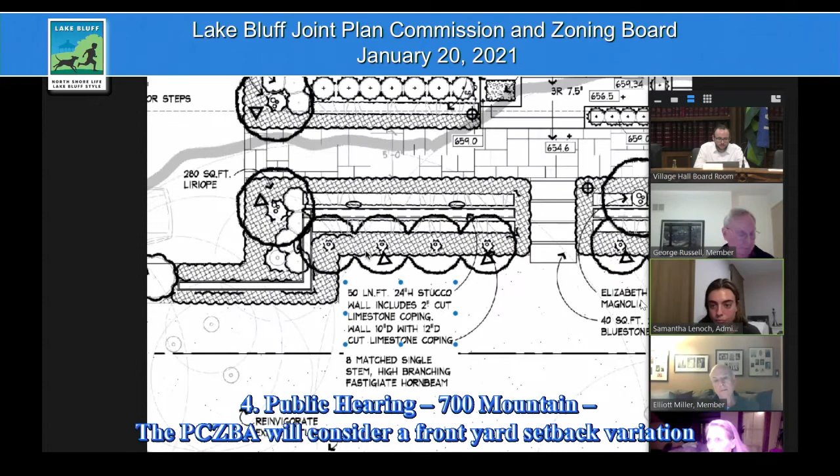Thanks. Okay. Are you seeing my screen? Yeah, yes, yes, okay, great.

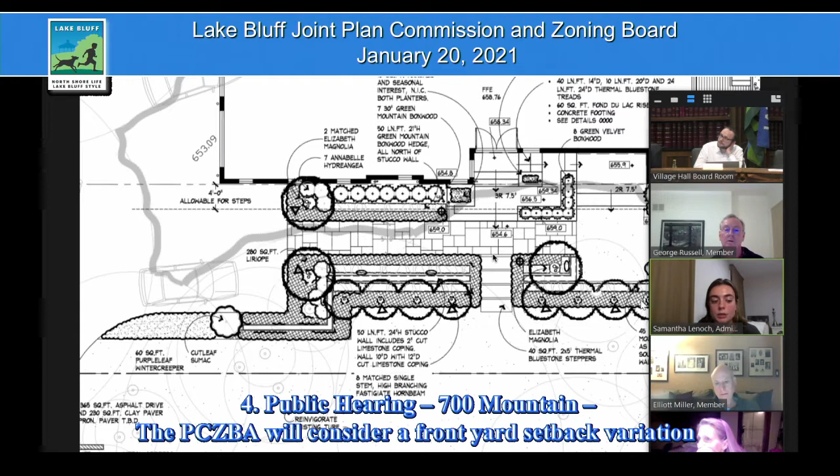So the village had received an application from the homeowners at 700 Mountain Road for a front yard setback variation to build a new front stoop and steps. The front porch and steps would encroach a total of 6 feet 1 inch into the 30 foot front yard setback. Front steps are able to encroach a maximum of 4 feet into the front yard setback, so the new stoop and steps together would need to surpass this by 2 feet 1 inch. Here's an overview - I don't believe this one is in the packet - but it shows the 4 feet allowable for steps plus the 2 feet 1 inch increase for the stoop and steps.

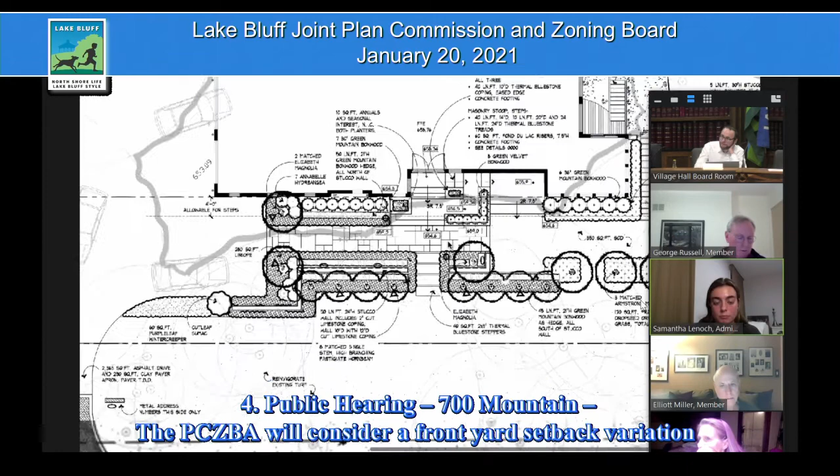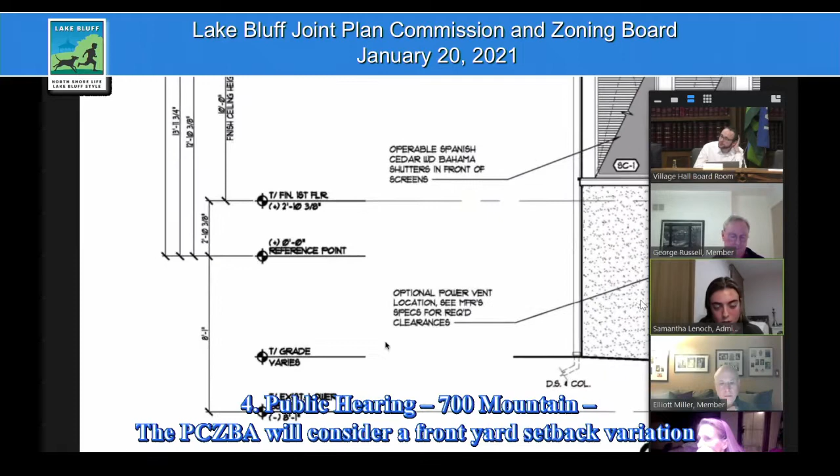And I also have the plan for the elevation as well, Glenn, if you'd want me to share that. Yes, if you would. Sure. Okay. So the south elevation here - for the commission's reference, the south elevation is the front of the building. Yeah, so this is the south elevation, that's the front of the building.

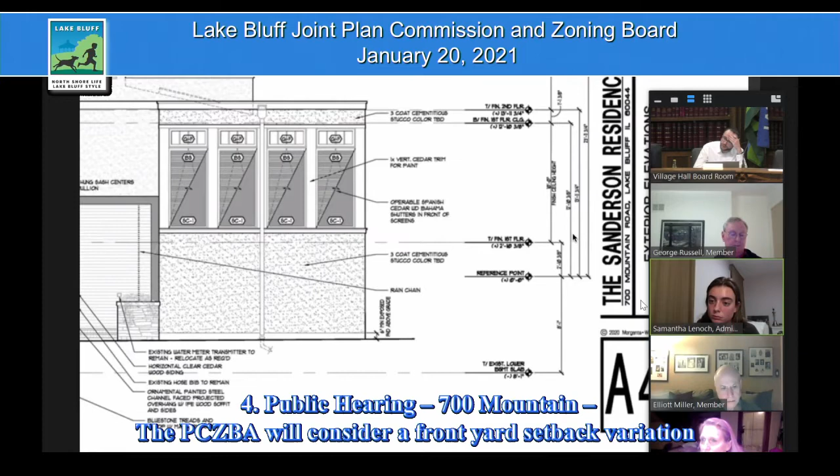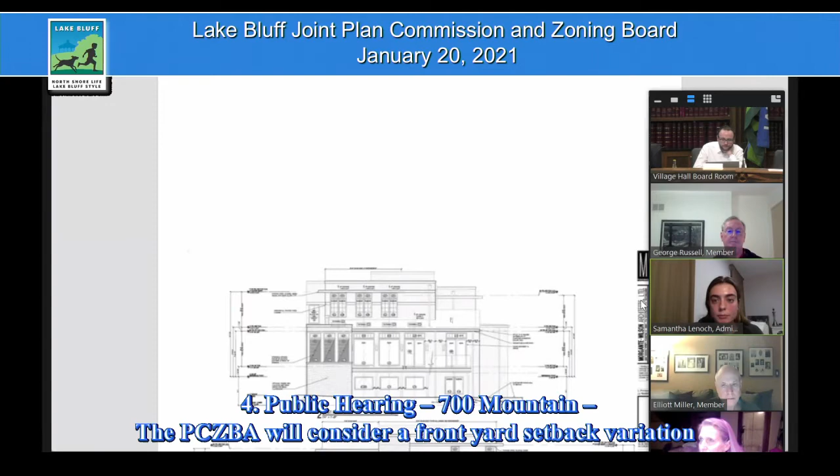And then Ms. Lenoch, if you would - I think there are a few renderings the applicant's architect shared with us as well, if we could go through those. I know those were only circulated earlier today, and we should make sure everyone has a chance to see those. Yes, I'm going to stop sharing this and switch over. Okay, so here are the pictures that were sent to us as well.

Maybe. Yeah, I also agree. I'm a little bit confused, I guess not confused, but it's not clear to me exactly where the variation starts and where it ends, from a top view perspective.

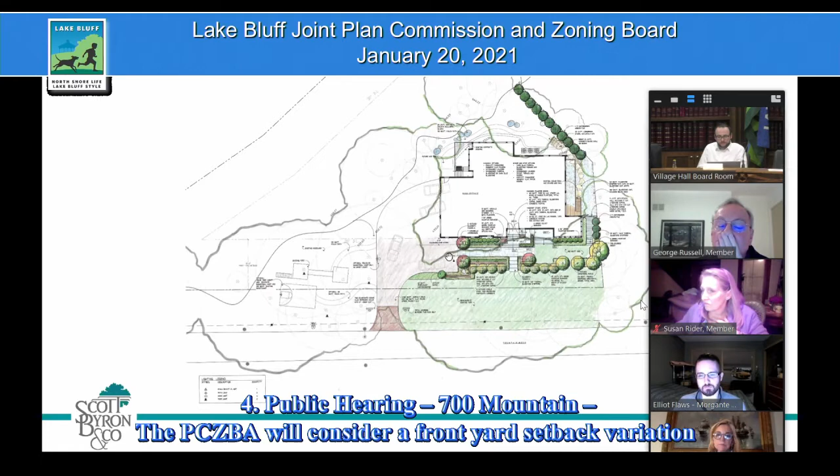So the variance package on behalf of 700 Mountain was intentionally and strategically outlined a certain way. The challenge quickly became for us, as we entered the landscape architectural arena, of how we get the client today from the elevation of those front doors down to ground level. So the client's ask of us was to make this aesthetically pleasing and also coincide with Morgante Wilson's effort. So what we'd like to present to you is this PowerPoint slideshow, and I can just quickly give you a run through. It'll create a backstory, a narrative, and an overall synopsis for everyone, and then I'd like to open the forum up to Q&A, if that's okay.

So, what we are looking at right now is a complete rendered plan, which highlights the aesthetic and how the overall landscape will coincide with the pursuit for this variance and how it relates to the front door and getting the client down to ground level. This is a final product. We feel that the aesthetic honors the Lake Bluff overall look and tradition. We can review this further, and you guys will have this accessible anytime.

The next slide will show us, once Ashley moves that, a direct effort in our pursuit. This outlines steps and the elevated planter walls, everything in red here. This is specific to the construction of the architectural component and also for Morgante Wilson.

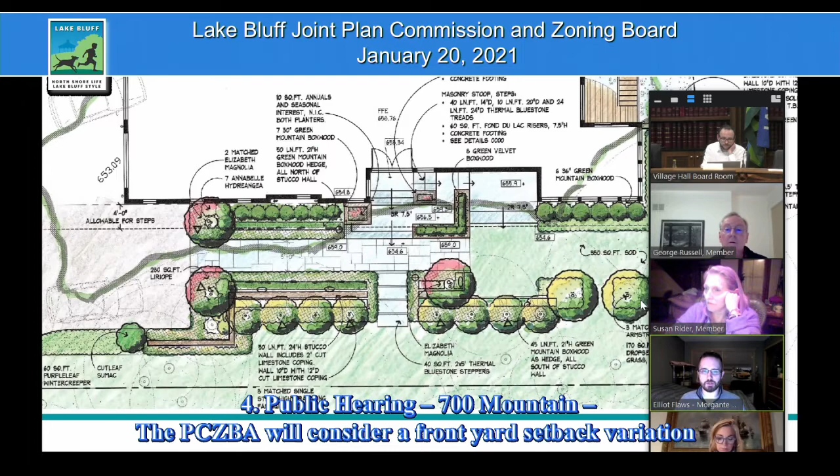So you can kind of see an overall picture, but what we're trying to get for a variance is what's extended into the front yard setback, just the leading edge of this stoop and stairs.

The difference between the front door elevation between the original existing home and where it's at now: the existing home had a 6'8" basement ceiling height, and it was the owner's desire to get a taller ceiling in the basement, make it more usable and more comfortable to be in that space. So in doing so, we raised the first floor up, and the front door had to go with that.

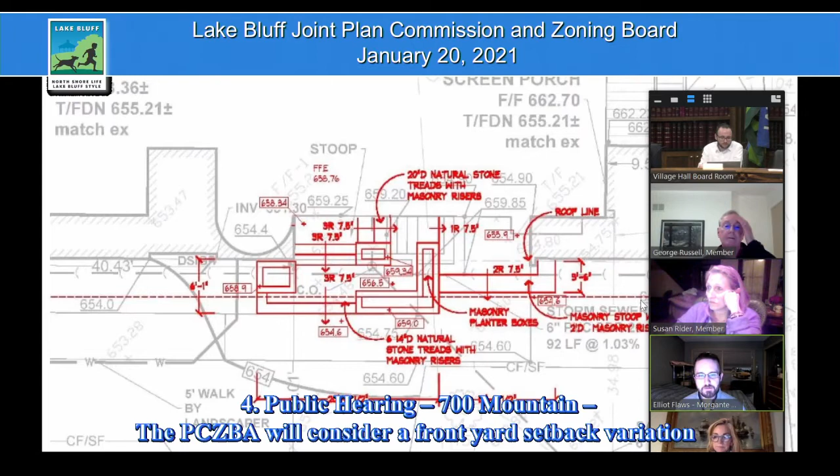Ashley, if you don't mind showing the first floor plan that I had sent you this afternoon for some reference.

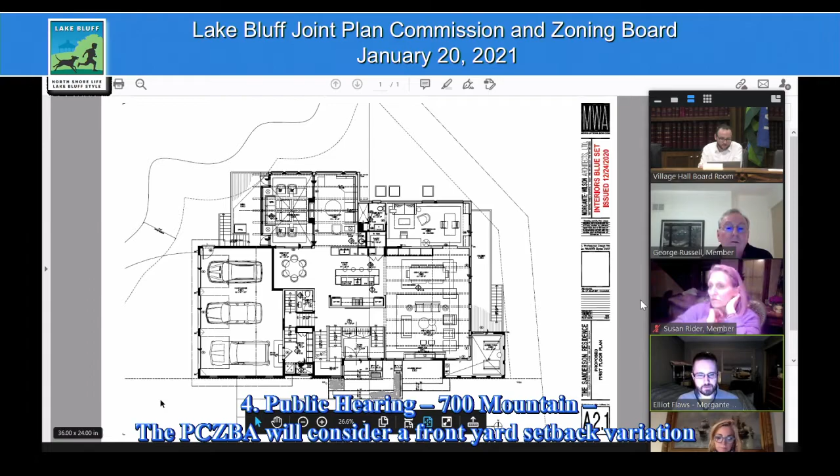So Ashley, if you can kind of zoom into that whole front entry hall area. One of the challenges we had when we raised the first floor up to get a taller basement ceiling is the front foyer was already a sunken foyer in the original house. And when we raised everything up, we kept the same footprint.

And so the existing original house had already 7 steps to get up to the first floor. Because of code, we couldn't add additional steps to keep that front door at a lower elevation, because we'd run into code issues with having applicable landing space at the bottom of those stairs in the foyer. So when we pulled the first floor up, we were forced to bring that front door up as well. And given the odd shape of the lot, Ashley, if you can go to the survey showing the buildable area.

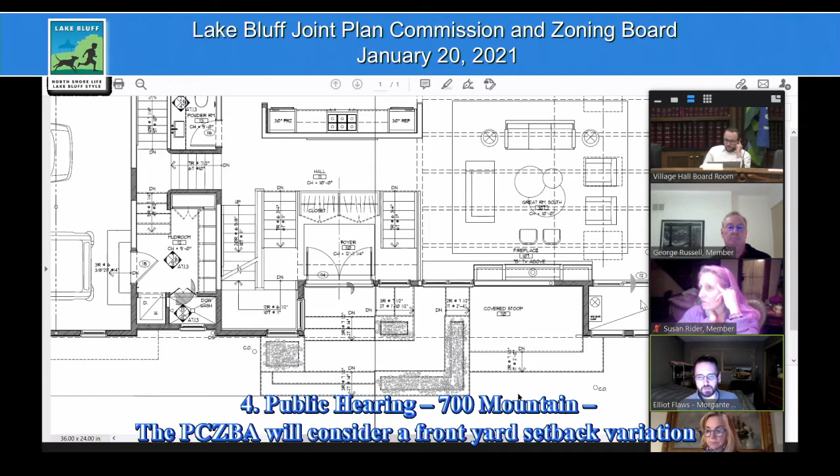The lot is actually quite large, but it's an odd shape where it goes to a point on the west side of the property. With a ravine being part of the property, it really cuts down the buildable area. So the original house is set very close to the front setback of our buildable area. And so with the higher elevation of the first floor and front foyer with the entry door, that required additional steps coming out from the front door.

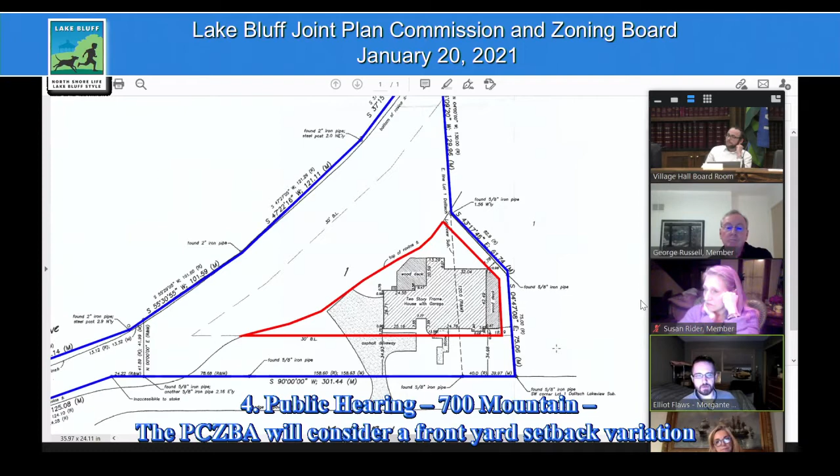So Ashley, if you can actually zoom all the way out to see the entire blue outline, which is the full extent of the property. And then the area highlighted in red is based on the ravine setbacks, the actual buildable area for that piece of property with the existing house on site.

So John, do we want to go through the items of the variation next? Can you elaborate on that? I don't understand the format you're seeking here. The items of the variation, is that what was said?

Yeah John, there's some standards the PCZBA needs to find that the application has satisfied to grant this. Those are in the application. Yeah, I can quickly read through that.

So outside of Morgante Wilson essentially honoring the existing footprint and foundation of the homes, this wasn't a tear down, so we are limited in honoring that foundation footprint. So outside of this inconvenience to the owner, the front door will not be accessible at the built height today without extending the steps past the 4 feet that we are allowed.

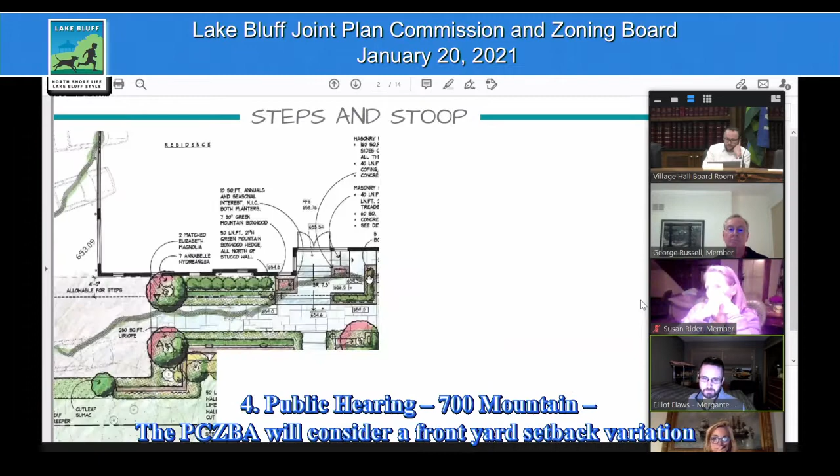So when there was a permit revision that was submitted and approved for when we decided to raise the first floor to get a taller basement ceiling height, and in doing so, we didn't have Scott Byron's team on board at the time.

To get that permit revision approved, when you step out of the front door, we had all the steps going east to a bottom landing, and that created a very awkward entry sequence because when you approach the front door, you're met with this very tall wall and guardrail given the height. So we designed it that way to get past the permit revision.

And once we got Scott's team on board, we started exploring better entry sequences to approach the house that looks more inviting versus a wall with a guardrail. So this design allows for an entry sequence directly up to the front door without the need for any guardrails, and easier access.

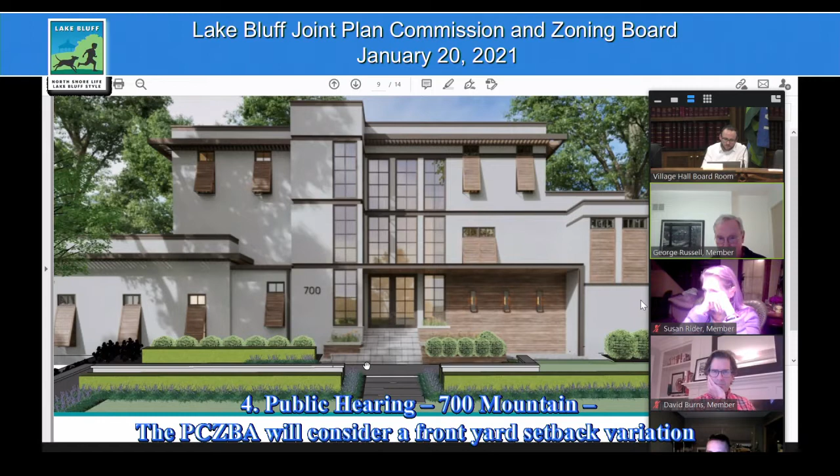Are these planter boxes several feet lower than the finished floor for the ones that extend forward, or is this misdrawn? So Ashley, if you can go to the renderings we sent you without the landscaping in it - this is the rendering from our renderer, Morgante Wilson. This is what we've provided, this is the direction of these planter beds. So in plan view, the first two planters you would approach would actually be at that intermediate landing level, which is what should be reflected on the plan as well.

And then when you step up to the main landing right outside the door, that's where you'll get that third planter bed to the right as you step up. Both your planter on the left side as you approach, and the forward planter on the right, you're calling those out right now at elevation 659 on your plan views, both what was submitted and what you just showed us. So they're labeled, if this is what you want.

I just need to know what you're asking us to approve. And it looks like, is there going to be a roof over this whole front area now? So the roof is all within, as of right, that's all behind the setback line, so that is not part of the variation because that's as of right.

Okay, but that's what's going. We want to see. You're asking for a variation, so we want to see how it works with how the house is being built, and before you showed us this, we didn't have the advantage of this look.

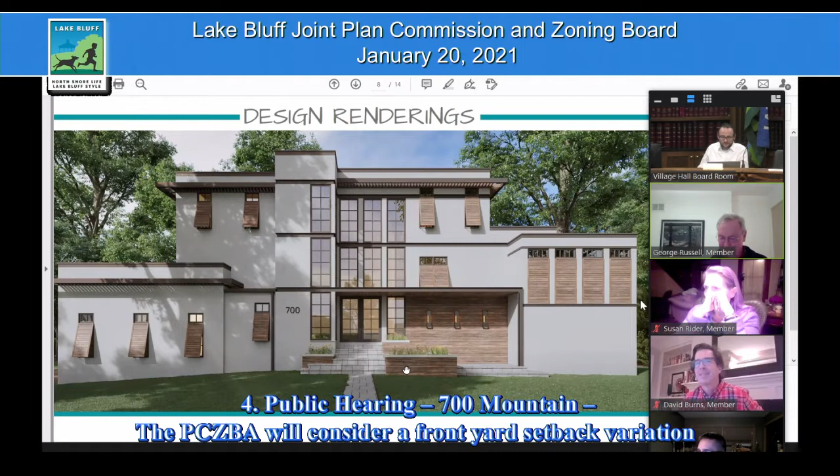Which one do you want? Give me a second, I need to pull up... I would have to ask John, Sarah, and Ashley. Can you pull up the plan that was submitted that has those elevations?

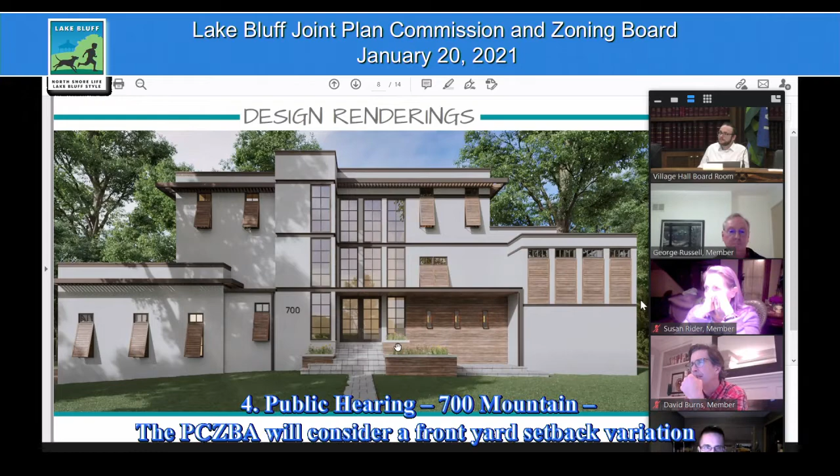Marilyn, as Ashley pulls these up, since you're the subject matter expert, will you speak on this, please? Before you comment, I'd like you to state your name for the record, and then I'd like to swear you in. I'm Marilyn Moss, Scott Byron and Company. Do you solemnly swear to tell the truth, the whole truth, and nothing but the truth, Marilyn? Yes, absolutely. Thank you.

All right, so George, if you're referring to this plan here with the elevation heights of 658.9 on the planter on the left, and the planter on the right being 659, that L-shaped one, those are not at the correct elevations on this plan. Those would be closer to that 656 elevation tag.

Okay, well, they're also wrong on your architectural plan view, or your rendering plan view, because you call them out at 659 there also. Okay, so good to know. So we have that clear, the planter boxes are not at 659, they're down at 657 or something like that. Correct. Okay.

And then what was really confusing in your elevation views is you have a completely new, separate decorative 2-foot wall that's going to run across the south side of the sidewalk. That's what really confused everybody, I think. But I'm assuming that does not need a variation because it's detached from the house and could be considered a small fence, which would comply with code. Is that correct, Glenn? Although you're probably seeing this for the first time also?

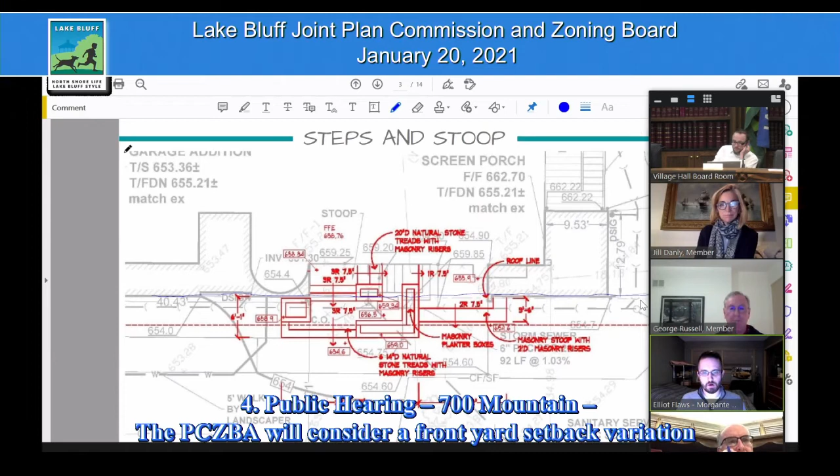So it extends 6'1" from that line, and the total width, you can see at the bottom of the screen, is 20 foot 8.5 from left to right to the planter, and then the second half, which steps back a little bit further, is another 19 foot 2.5. I believe what the code allows is a maximum right now of extending 4 feet with a 5.5 foot width. So we're looking for a variance to go beyond that for this configuration.

And do you contemplate any impact on impermeable surface area or on drainage or anything like that? No, because of how large the lot size is and how small our buildable area is given the ravine setback on the property, we are well underneath the impervious surface calculations for the property itself.

I would agree with that. I did the calculations, and we're well below.

Specifically, I would add—I'm pulling this sheet up here. So just in general, there's a very large portion of, just for practical reasons, non-buildable area on this lot. In addition, a curious way the village's code works in this case is that the amount of impervious surface permissible on a lot varies with width, and this happens to be an exceptionally wide lot compared to its depth. I don't have the permissible amount handy, but overall on their civil plans—I'm not sure to what extent this patio is reflected—less than 15% of the site is impervious, as you can tell, I think, just visually. So just wanted to note that.

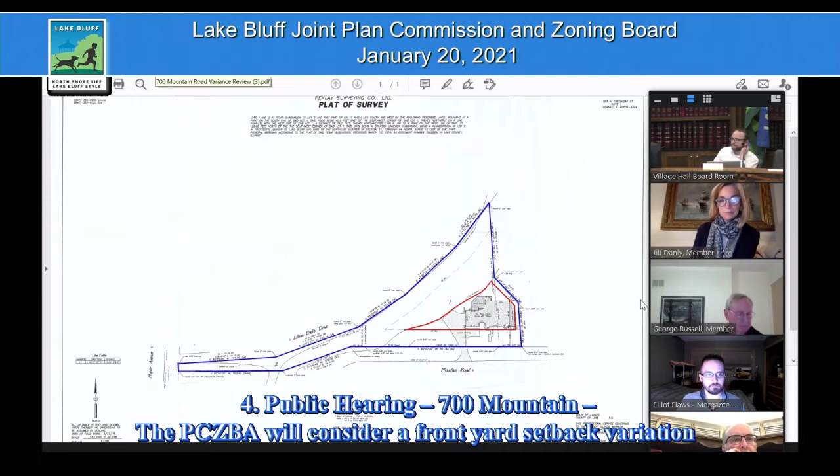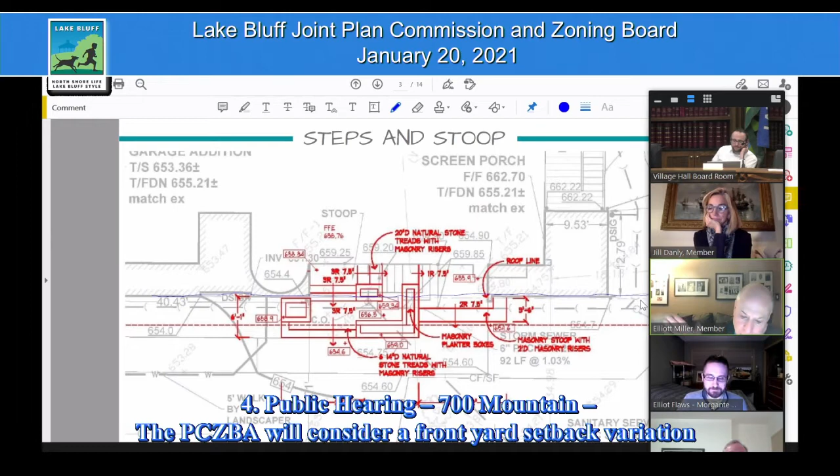Has the village... I'd like to make a comment. This is the other Elliot. Yeah, certainly, Elliot—I perk up every time I hear Elliot. And we don't spell it the same way. And I see the view looking to the east, the rendered view looking east.

So we're talking about the planters — is the planter to the east beyond the 4 feet? Is the planter to the west beyond the 4 feet, the lower one? Two-thirds of it would be, yes.

The upper portion of the L leg going back towards the house, part of that I believe extends into what's allowable within our setback.

Your other drawings show that there's actually a pathway going from before you get to the 3 steps toward the garage, is that correct? From the driveway to the front steps, that would be in the landscape rendered plan, correct? And that's within code? As far as I know, yes, because that's at grade. It's not raised, it's not a raised walkway.

So a couple of things come to mind after this discussion. One, there's no uniqueness about this request. It is special privilege because it doesn't have to be done, so for that reason I'd say it's probably not necessary to give you a variance. That said, I'm not even sure why they have steps going to the front because there's no sidewalk. They're never going to go out those stairs and down onto their grass except to mow it, and my guess is they're going to have a landscape service. So it's purely aesthetics — they're always going to come out the front door and go toward the garage pathway. There's no reason to go out on the grass.

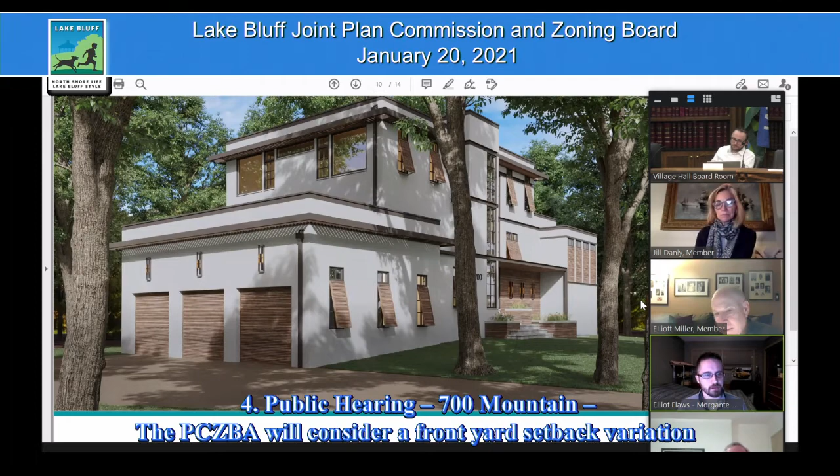Elliot, I'd like to take a moment and make a quick response. Ashley, if you can go back to the rendered plan for a moment, please.

And if you can circle or highlight in some way the walkway from the drive and the steps going out, or not the steps, but the stepping stones going to the yard.

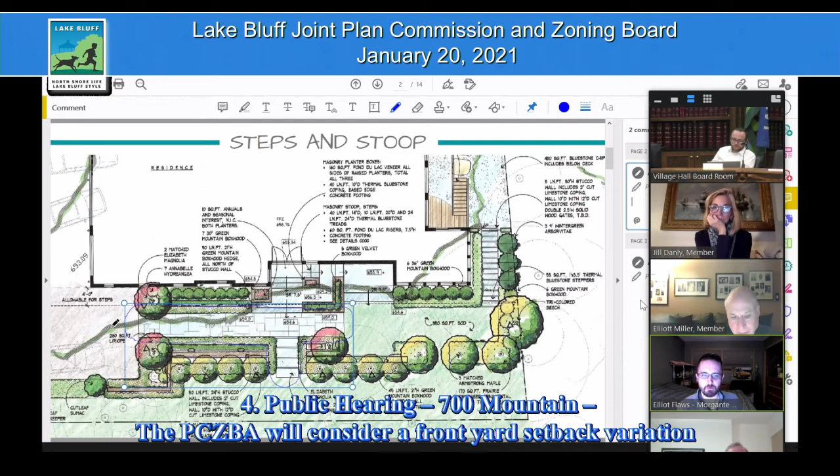So this element, the way I understand your concern or comments, Elliot, is that we're leaning towards responding to this element here, the stepping stones going out to the yard. But that, to my knowledge, is all as of right because it's at grade. The only thing we're asking for a variance would be the actual steps above that.

I understand that, but I'm just saying that for some reason 2 feet is creating a lot of conversation here, right? It's really 2.5 feet that we're talking about. Yes, it's a lot of conversation.

And I think part of it's because this wasn't clear to begin with. I apologize. Maybe in the future it could have been handled differently if we came out and said I need 2.5 feet, I have an aesthetic view that's important to the family, and so forth. Again, it's 2.5 feet, it's not encroaching on anybody.

There's nobody in front of them, and there's no sidewalks, so it's not a big deal. Theoretically it shouldn't be a big deal, but it's become a big deal. I apologize for the confusion. If we're ever in front of this committee again, which I know we will be in the near future, we will prepare differently. I apologize for all the confusion.

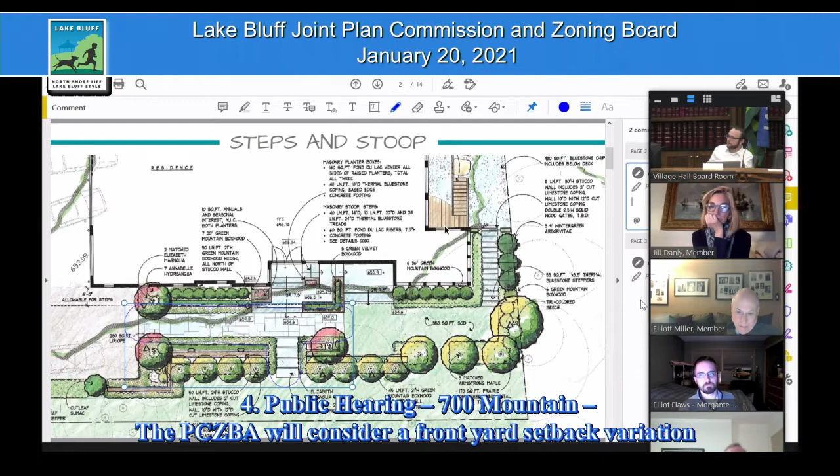So we've had that original plan set that shows that 4-foot dimension, the 6'1" dimension, et cetera, which matches the pre-version here for a while. The members of our team have taken a look at it and didn't have any particular comments on this.

Thinking through some of the other comments raised by the commissioners, there are no precedents in zoning. Certainly I can think of applications that have come before the commission that have been received both favorably and unfavorably similar to this. Again, I'm happy to, if there's specific questions or specific thoughts, go into that.

I guess the last thing I would say is, this is in some ways, typically you don't see variation requests submitted under construction. Here, until the point was raised, it hadn't really occurred to us, or to me at least. It is interesting how the work has been broken out, but in some ways this is sort of a different project with a different contractor. It's certainly part of the bigger project and they're cooperating with the architect here, but I think, but for the floor elevation, this could very well have just been an improvement project standing on its own. So that would be my reaction to what we've heard so far.

No, thank you, Mr. Cole.

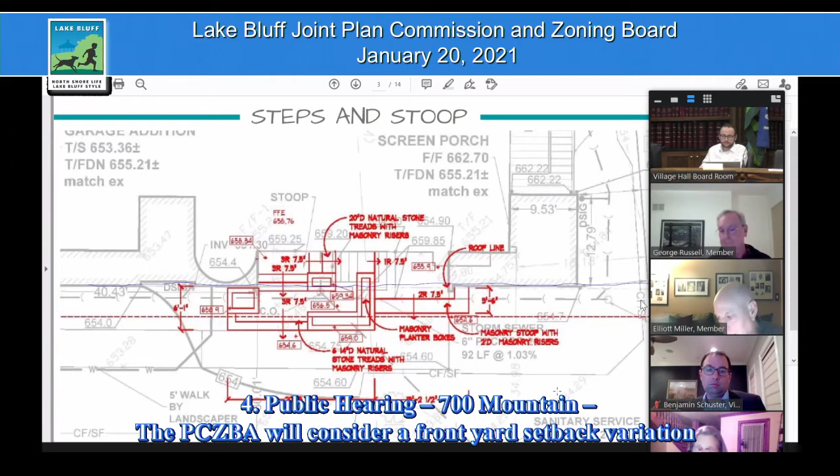All right, agenda item number... Can I make a comment? I have one more comment for the future. Certainly, Glenn. Yes, Member Miller.

Can we not wait to the last minute if the renderings look pretty crummy to begin with, and somebody at the village say it's not acceptable to present to the board? What we got in our packet, I couldn't even understand the drawings. It looked like my grandkids were just scribbling on a piece of paper. And then to come in today with these drawings, which we had no time to look at - I think it would have served us better, and we would have gotten to it quicker, if we postponed this another month. It's certainly, in their scheme of things, this house has taken forever to build anyway. They weren't in that big of a rush. In the future, can we just have more upfront than what we had this time?

Yeah, certainly, I personally will take responsibility for that. It's always a bit of a discretionary call how much material you ask for from applicants, especially something like this where you have a lot of patios and planters and things that aren't necessarily structures. It's a hard call if you want to ask an applicant to put in the cost for rendered elevations. In this case, we didn't, and if I could do it again, we would have asked for that earlier, and we would have worked with the applicants to bring you a better presentation. So I apologize for that.

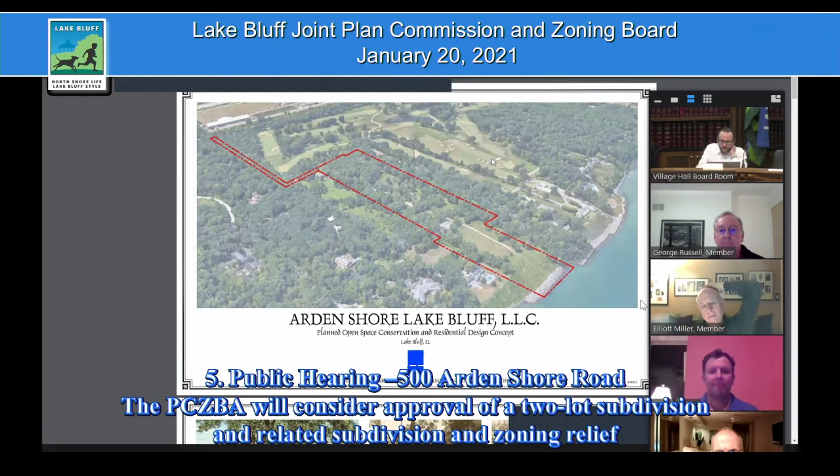Thank you. What you're looking at here is the entire 26-acre property. What you may or may not know, the very little stem that's going out to Sheridan Road is our only frontage, and this is a point of one of the variances. That little skinny L-shaped stem contains Arden Shore Road, it's about 20 feet wide. When it gets to the elbow of the stem, there's a South Arden Shore Road that goes back to the Kellers' residence, and there's an elbow North Arden Shore Road that comes into our property and also serves Mr. and Mrs. Booth's property. Arden Shore would remain, but the main purpose of showing this is the frontage on Sheridan Road, and the Arden Shore south that goes to Kellers would remain.

It would remain serving the Booth property, and the old Arden Shore access would stay from a maintenance point of view. I'll show you that in one of the later slides, how we are going to use at least the corridor. Glenn, can you push through the next one or two?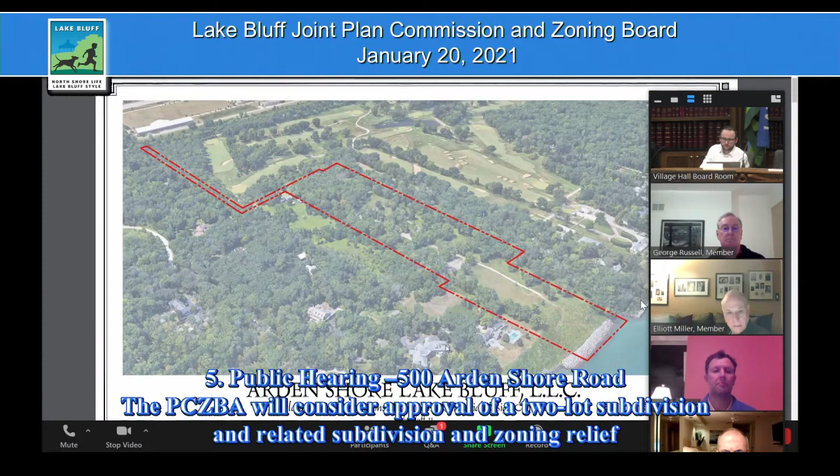You all may know the Arden Shore facility had about 14 buildings on the property. They've all since been removed, but it has a long historic legacy to it. That would explain, for anybody who would want to go out to the property, what this property was - leveled and contained, with a lot of the flat frontage and the voids in trees once containing several buildings.

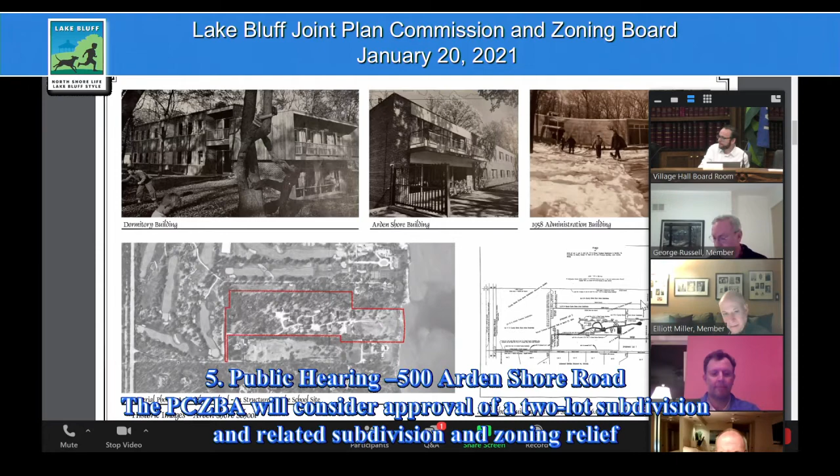Many of these buildings have long since gone. The next slide would show you the last version of the buildings that were there - believe it or not, SOM architecture. When a previous buyer bought the property, those buildings were all removed. That little thumbnail survey on the lower right shows where the buildings and roads and improvements were. The only thing really remaining is the roadbed and one well house right in the middle of the property.

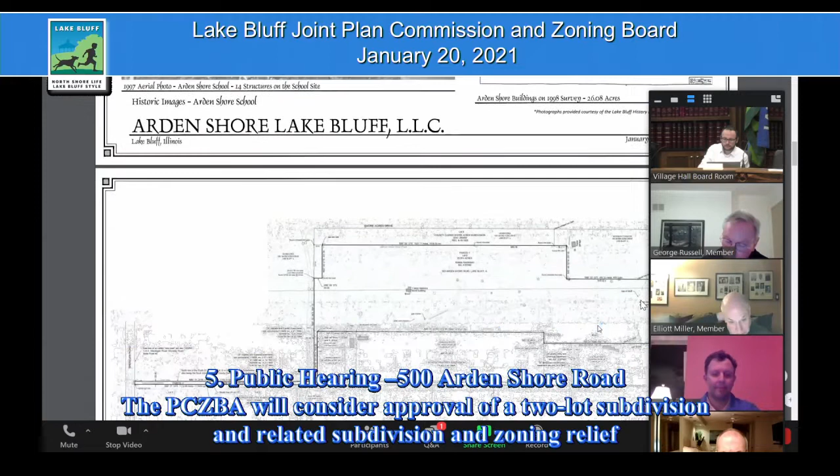We can come back if you have questions on these. Thank you - the survey of the property has been completed, and just showing you progress, we'll continue on.

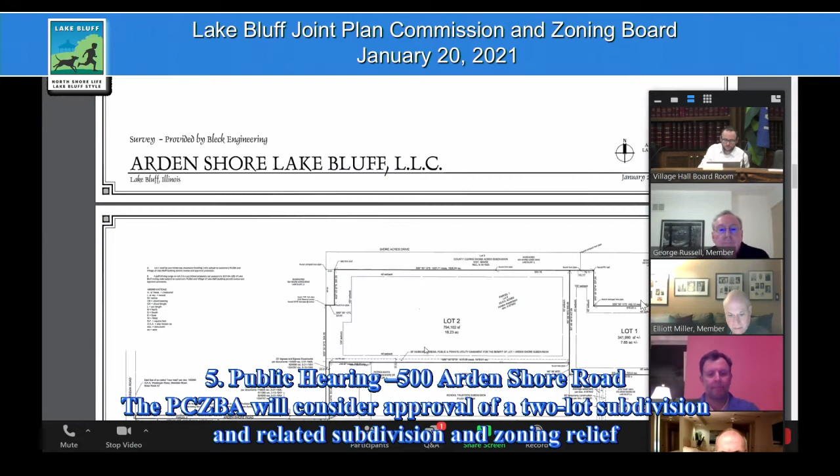The survey also has been supplemented with a subdivision plat, and this is worth looking at. Lot 1 is our eastern lot that would contain the residences, and Lot 2 would be the portion that would support and has been purchased by Shore Acres. You can see the split line between 1 and 2.

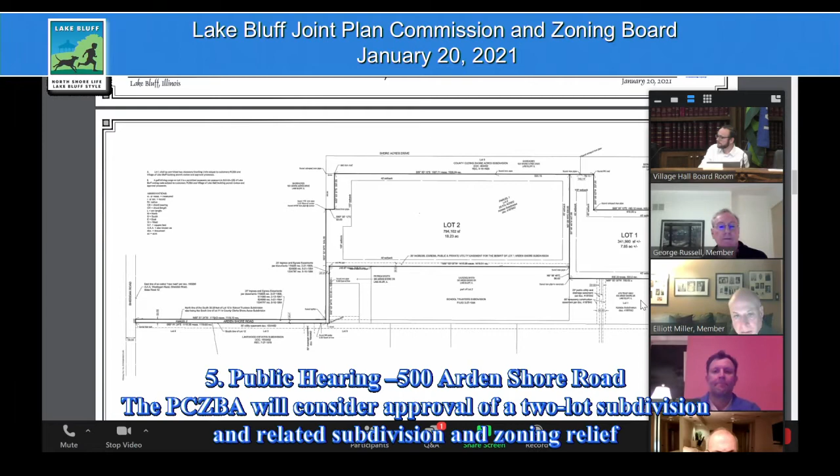There's a panhandle piece at the top of this image that allows Lot 1 to access an easement that goes up to Shore Acres Road. Lot 1 will no longer be using the old Arden Shore Road as its primary access, and instead would be using an access by permission with easement up to Shore Acres to the north. That's what this narrow piece is - we're seeking a variation for it. Otherwise, Lot 1 is 400 feet wide of lake frontage, so this is really just for the access to get up to Shore Acres for public safety and access provisions.

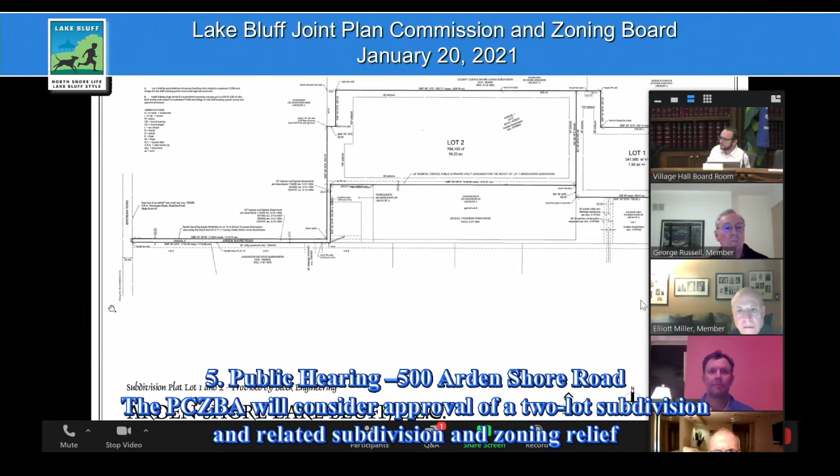We also have supplemented this survey with existing trees. Each one of the trees has been identified by species, size, form, and condition. It's a multiple page document that we'll be using as we go forward, pending subdivision approval, but prior to getting final permit, with the tree inventory and further definition of tree preservation to support the uses that we're looking at.

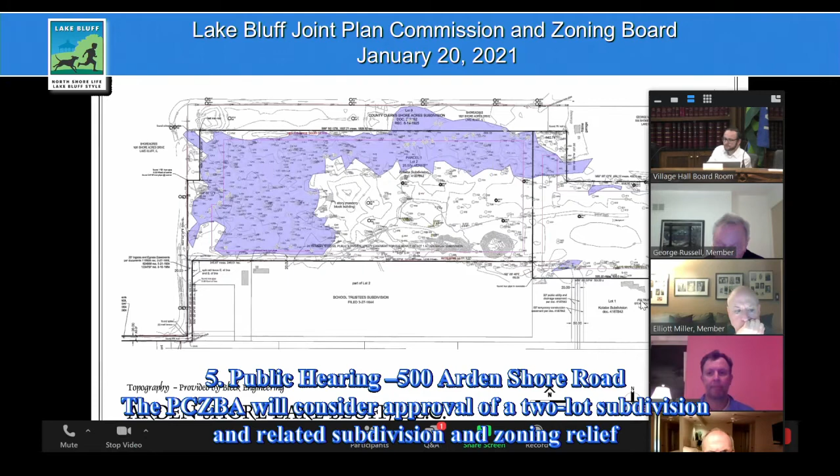If you continue on, thanks Glenn. The existing contiguity with Shore Acres is evident here. You can see how the narrow practice range of Shore Acres is right in the middle of the screen, which will be supplemented with this new practice range.

Our neighbors to the north, the Covingtons, and to the south, the Kellers and Booths, were present in the previous conversation. We don't know that we've heard anything further from them, other than they seem to be supportive of what we're proposing.

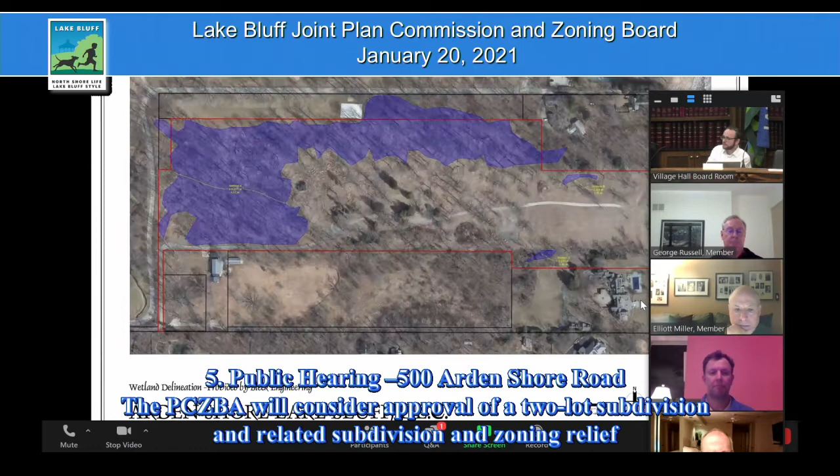Into the site plan is next. I'm moving through these quicker - we can come back to any one of these. Thank you, I think we'll keep going.

This was nothing more than a GPS location, and then just showing you progress on how the trees are populated. A lot of them are in the wetlands where there were buildings on Arden Shore - you're seeing openings and voids through here. I really wouldn't use this as much as I would use that more technical survey. We did do our tree inventory in the early part of December 2020. Please go ahead, Glenn, thank you.

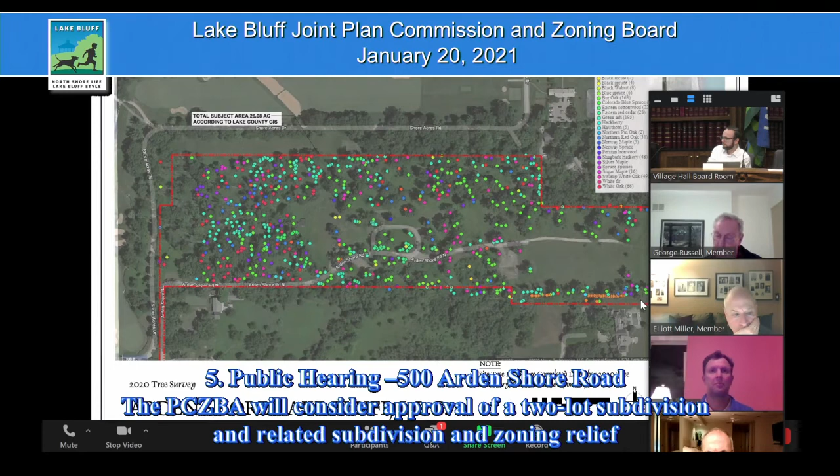We have the idea - if you go to the next one, it's a little bit bigger view, same thing. What you're now seeing is Lot 1 to the east, Lot 2 to the west, which is the practice range. The homes that we're proposing on Lot 1 would be a primary residence and two additional supplemental residences - one up at the top northeast corner and one at the southeast corner - but these are really just placeholders until we start to program the site plan and the architecture.

So it's really for reference purposes at this point, but you can see the great openness of the property, which is really the point of why I get enthusiastic over this application, is that we really have an extraordinary opportunity here to accommodate a lakefront residence and an adjunct to the dignity of Shore Acres to improve the golf playability.

The driveways you can see coming in to Lot 1 are attached to Shore Acres Drive. You can see the yellow hatch area that's allowing us to convey the drive that we have coming into the property across Shore Acres property into that panhandle piece, and then it will loop into our property. There was a comment in our last meeting from the Covingtons, and we wanted to make sure we avoided a small corner of the Covington property, which we've made an adjustment for.

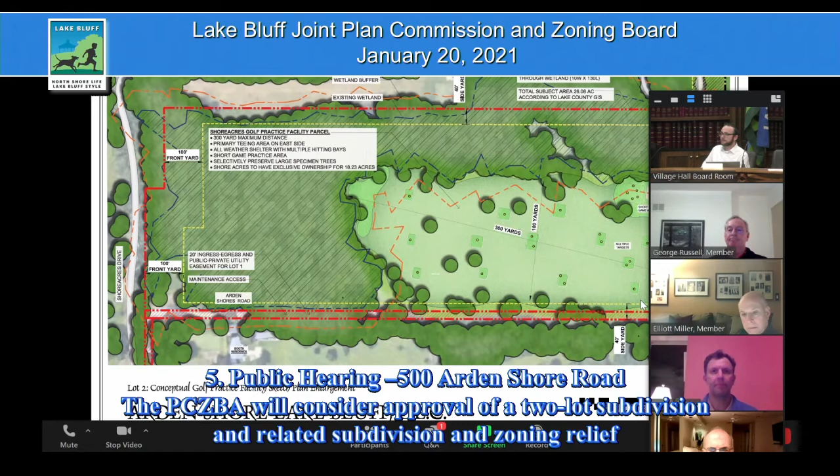And I believe I'm coming to the last two slides, Glenn.

Lot 1 is 7.85 acres, a little bit over 400 feet of frontage on the lake, with the ability to support one primary and two accessory dwellings on the property, keeping a great abundance of open space. The driveway you can clearly see now coming into the property, and the setbacks from the north, the Covingtons, and from the south, the Kellers, are commitments we're making to side yard setbacks for the primary buildings. Those are 40-foot setbacks, the yellow lines, on all sides, and then we would have to abide by the rear yard setback along Lake Michigan for where the primary home is.

As you may know, the bluff itself has already been reconfigured. That shadow V shape is actually a foot trail that was graded at the time the slope was graded and engineered back. There's a stone revetment down at the lakefront, so it is very stable and already ready for anybody to come site the home on the property. We don't have a steep slope and a cascading hillside here. We have a very stable, vegetated hillside that we're looking at.

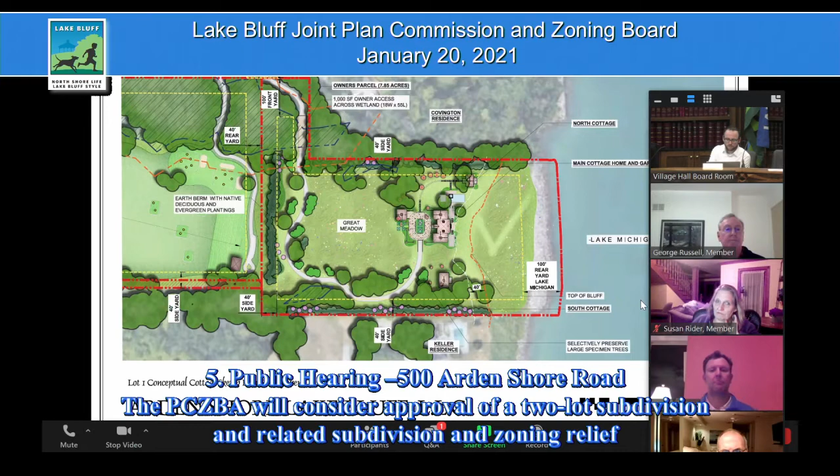I conclude with this, back to Mike. The last picture was a little bit of an inspiration, but standing up at this top north edge, we were really looking to try and get this view.

This was, I think, a November day. I'm seeing all the way down to the south end of the lake, your beautiful lakefront in Lake Bluff. Your pulse rate drops about 10 points or better when you get this panoramic view. So that may explain a little bit of the enthusiasm that we have over this property, as well as the new owners would have.

Mike, I return it to you. Thank you, and maybe we go back to the site plan if you would. Thank you very much, Glenn. Liam, I apologize for passing over you before. Did you want to make a couple comments about what your vision is for this? And then we'll ask Glenn to do a staff report.

Sure, just a quick recap of what I shared late last year: our family lives in Chicago, and we were excited about this property and the possibility of creating a place for us to go on weekends, vacations, and holidays. I think we were really attracted to Lake Bluff and this property. We love the feel of Lake Bluff, we love the feel of this property, we love the feel of the CE district within Lake Bluff, the traditional country estates and beautiful homes by architects like David Adler.

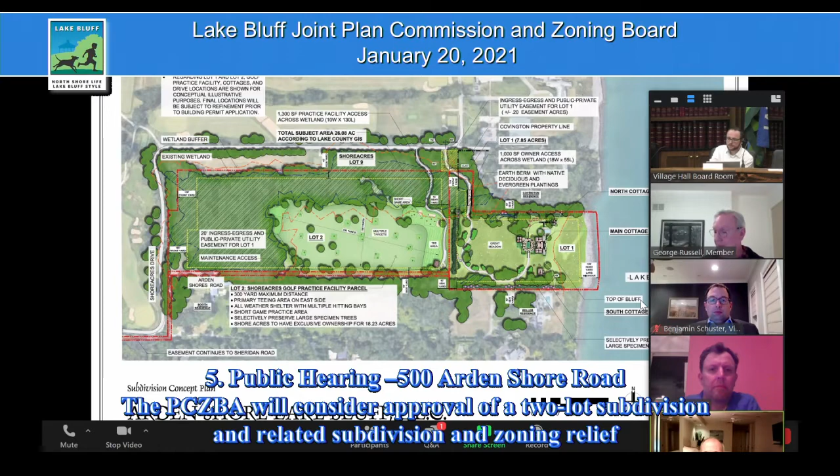If I could just add to your comments, there's a call out in the title policy for an easement that was granted to the village of Lake Bluff expressly for this purpose in 1998, when Kotaba did the 2-lot subdivision. I'm not sure exactly where the easement is, and it's not clear from the title commitment, but I believe the Kellers have that municipal utility easement north-south along their western lot line, which would dovetail almost perfectly into the western portion of our Lot 1.

So I see no problem in us providing a continuation of that easement north all the way up through the flagpole of our lot. Oh, there it is. So we'd have to zigzag it along our southern boundary over to the western boundary and then north, and then it would tie right into Shore Acres Drive, the 90-degree turn on Shore Acres Drive.

Yeah, but we could provide that. That might require some directional boring underneath a berm at that point, but that's not a big deal. Part of one of the issues we're waiting on is trying to get some opinion from the village engineer as far as, with a main of this diameter, how much tolerance that has for 90-degree turns, or how much we can convolute it in a relatively short span of space. So those are some of the questions we're trying to nail down.

Well, if we tried to keep it straight and just angle it over to the flagpole, then you'd have to talk to George Covington about bringing it up through that western portion of his lot as well.

But Mike, this is Nick. Ideally, we were going to try and have it reside within that setback that's shown on the screen now. And if there's gentler turns necessary, with composites of 45 degrees to get to the 90-degree turn, we can easily do that within the 40-foot setback.

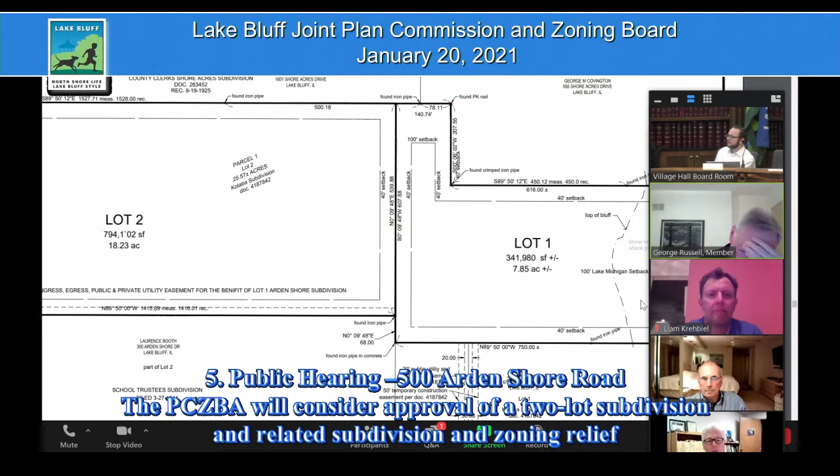Going across the Shore Acres property, there needs to be some sort of other legal indication that the owner of Lot 1 actually has the right to use Shore Acres Drive. So that's a different easement, but those two elements should definitely be on the plat and maybe even repeated in the approval documents, because otherwise Lot 1 is left high and dry, and it shouldn't be something that's waived. There's a lot of little stuff we're going to waive on these plats, but that's important.

For public safety purposes, I was very surprised to see it being suggested that the address for Lot 1 would be an Arden Shore address, because the primary driveway is going to be off Shore Acres Drive. I'd be surprised if you asked the fire department, that they wouldn't want that lot to have a Shore Acres Drive address, since that's where normal access will be. There's no telling what condition that maintenance road along the south edge of Lot 2 will be in 10 years after the subdivision and driving range are built. So you might want to follow up on that.

Yeah, I did have a question. I would certainly say that's just a placeholder. We typically don't assign addressing until after we go to record a plat. So we're hoping to have those picked out for the ordinance, for vanity purposes in this case, but ours, not Mr. Krehbiel's or anyone's. But it's good to have a point of reference aside from just a subdivision name sometimes. So that's the stub there in the ordinance.

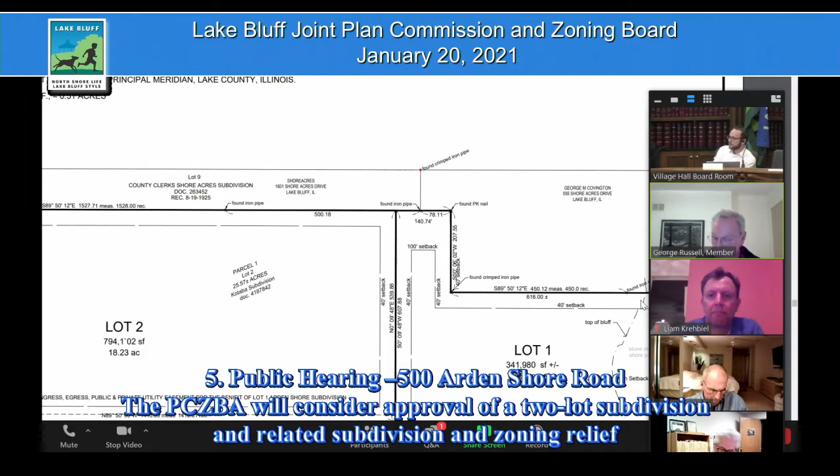Okay, and then a question about the 10-foot variation for the fence. It's clear to the applicant that would be 10 feet from pre-construction grade, not fence height on top of a berm or half a berm. If there's a 5-foot berm, you can only have a 5-foot fence if you give him a 10-foot variation. If he wants a 10-foot fence on a 5-foot berm, then he needs a 15-foot variation. So that should be cleared up before

it's finally approved by the board. Yes, and that was my understanding, 10 feet from grade. That's right. Okay, well, I would interject there, Member Russell. There are other parts of our code. We looked at this issue a bit. Perhaps there's something else you're referring to. There are other parts of our code that have restrictions based on the pre-existing grade. We did not find that language in the fence regulations. Okay.

I'm almost done. The one thing I don't see addressed in the document at all is the issue of impact fees for the 2 ADUs. I know the intention right now is for these 2 ADUs to be used as guest cottages, so to speak, but at some point they could revert to full-time rental by some future owner. And right now, even if someone in the village had a two-bedroom apartment added, we would be charging impact fees of $20,000 each. And it seems to me that staff needs to nail that down before it goes to the board, what the expectation would be and how this would be tracked.

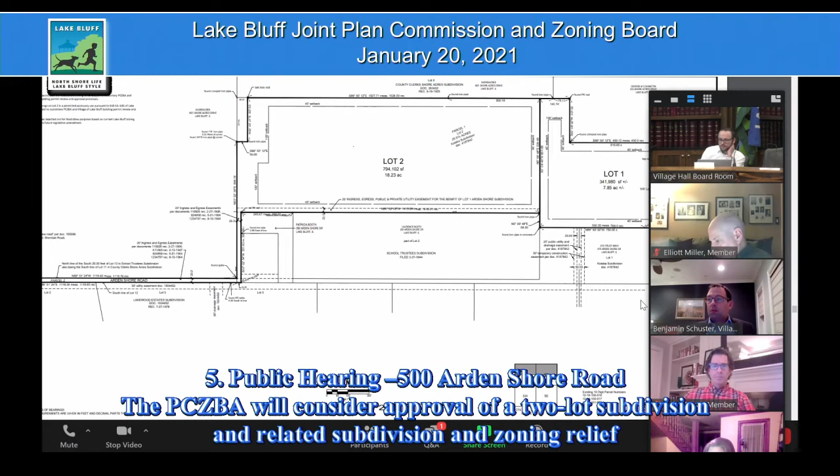Please identify yourself for the record. Mr. Covington, you're able to speak to us when you're ready. Good evening, my name is George Covington, and I live just north of the property. I've been there for about 40 years. I've seen a lot of plans in the past. Rick Swanson had a pretty conventional and bad plan for 25 houses on the property. I've seen a lot of clustered plans for as many as a dozen or more houses on what would be lot 1. This is by far the best plan I've ever seen, and my wife and I enthusiastically endorse it. In our minds, it is completely consistent with the philosophy of the CE district.

In many cases, because of Crabtree Farm particularly, the overall density in the CE district is far less than one house per 200,000 square feet. This would continue that very low density approach. I'm also pleased it protects the wetlands. It provides a better golf practice area for Shore Acres, which involves an element of safety, because more than one person has been hit. If you're as bad a golfer as I am, you're likely to slice into the driveway and hit a car. I haven't done it, but I do know people who have hit cars or have been hit by cars.

My only tweaks on this plan would be - there are a lot of really magnificent trees on the property, both on lot 1, but particularly on lot 2, and I would certainly hope that everything feasible could be done to preserve those trees. If any have to be replaced, I would hope that they also would be replaced on this property, not on the adjoining golf course. I think that would be sort of self-defeating if they can be moved onto the adjoining property - they should be replaced. Trees removed on lot 1 should be replaced on lot 1, and similarly with lot 2.

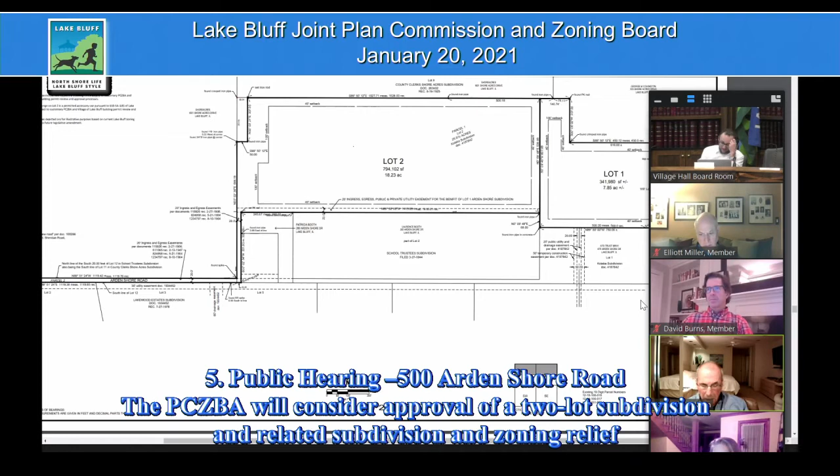The ADU side yard setbacks, that's fine. The other accessory building setbacks, keeping them at 40 feet, I believe Liam said he could live with that, although from my perspective 20 feet would be better, but if the applicant can live with 40, so be it.

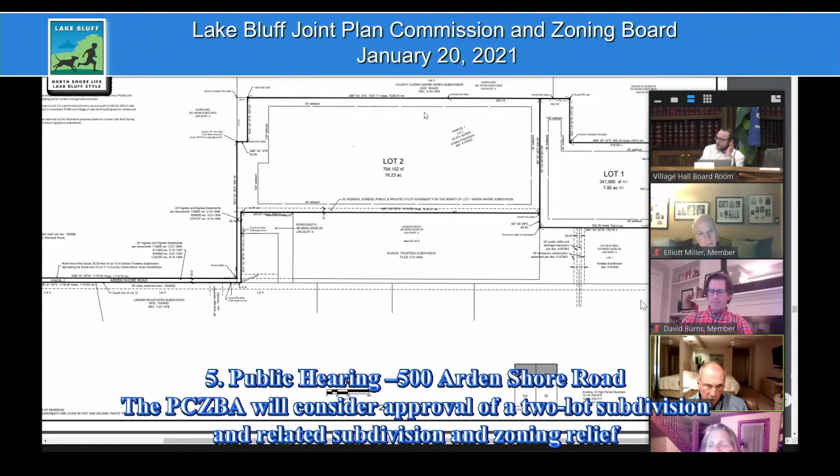The 54-foot side yard setbacks on lot 2, I think that's fine to the south and to the north. I believe the applicant was happy with the 40-foot side setback on the boundary line between lot 1 and lot 2. We're agreeable to no accessory buildings in the pole section of the lot 1 flag lot.

An issue raised was that the plat doesn't show the easement. If you look at that survey, the easement's going to be the west 70 feet of the existing driving range. The primary reason it's not shown on the plat now is because the attorneys for Shore Acres, Meltzer, Purtill, et al., are drafting the two easements.

The easement off of Shore Acres Road, and then the construction easement and emergency easement that we're going to be provided along the south 20 feet of Lot 2. They're in the process of drafting them now. Until they do, and then we get Bleck Engineering involved in calling out a legal description he could put on the plat. But that's all administrative. Everything so far that we're talking about is administrative that we can work out with Glenn and the rest of the staff engineering.

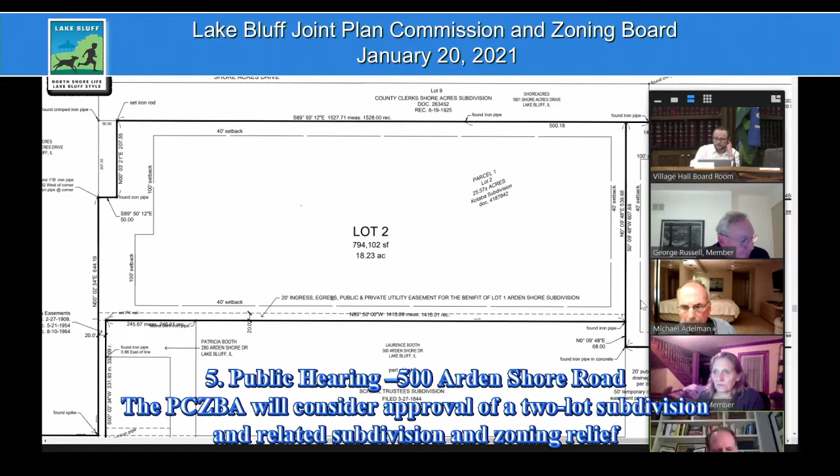All right, agenda item number 6, public hearing to clarify country club golf courses in the CE zoning district. Mr. Cole, if you want to give a brief overview, please.

Certainly. So very short, these current regulations about country club golf courses use a term 'tract' that's undefined. It's pretty vague in the code. These regulations date back at least to the 80s, we believe, possibly earlier, based on just the revisions in the code.

Actually, the plat you have here resolves this immediate issue. Very technically, this very long 20-foot corridor goes around into an unincorporated area, and it's more contiguous than we expected this plat would be. But we still think it's a good idea to clarify that applications like the type you see here are contiguous. A country club golf course is a permitted use on a lot such as Lot 2 that you're seeing here, because it is part of 120 acres, even where some of that is outside the village, and so by extension, some of that land is outside the CE zoning district. So it's a technical clarification, but an important one, and one we wanted to put through here.